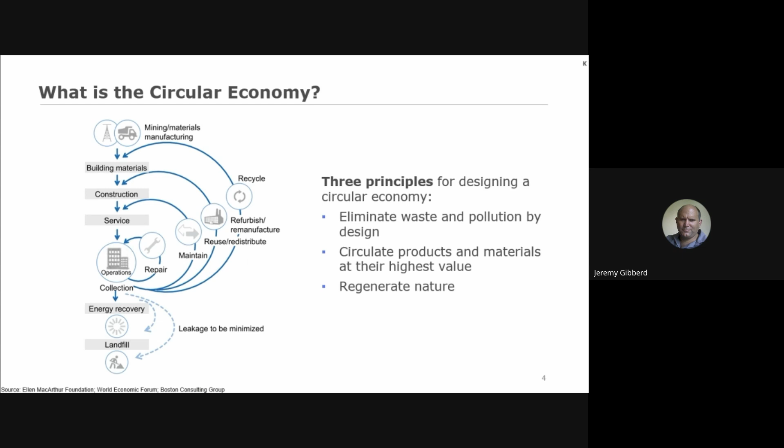So the preference is really to stay in the inner loop first, to repair and maintain first, and then to redistribute and refurbish, and to recycle later. This is sometimes also called the inertia principle. We don't go to the next loop until the first loop cannot be pursued. So we're focusing on the inner loops first.

The third principle is the regeneration of nature. By extending product life, we need fewer virgin materials and at a lower frequency, which allows nature to take a break and to regenerate. Also, by generating less waste, we need less space for landfills, which will provide breathing space and habitat for biodiversity. And by actively seeking to circulate biological substances, to use fewer chemicals and to reuse nutrients that are in the systems, we change the quality of soils and overall allow nature to restore.

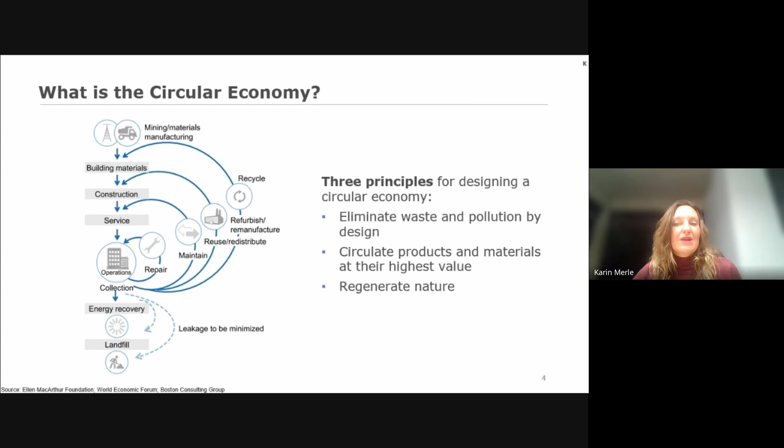As a matter of fact, the construction industry uses a large portion of natural resources, and the waste produced at construction and demolition sites accounts for 30% of total waste produced globally. An estimated 75% of the construction and demolition waste has a residual value, but it is not used nor recycled.

And you can see on the right-hand side of this illustration that there are actually options to recover such materials, for example, as fertilizer additive, as gravel, or as road building or flooring materials. A study team looked into the case of the city of Vienna and found that if Vienna were reusing and recycling the construction mineral, then the city could actually reduce its need to import by 32%.

And for example, under the leadership of the Do Tank Circular City Vienna, that is a strategy for 2020 to 2030, Vienna decided to launch a first pilot project in an urban expansion. The elements that they utilize include landmass coordination with mobile machinery, and another one is planning and construction building with a higher circularity factor. In this pilot project, they aim to use recycled concrete and insulation material in new buildings.

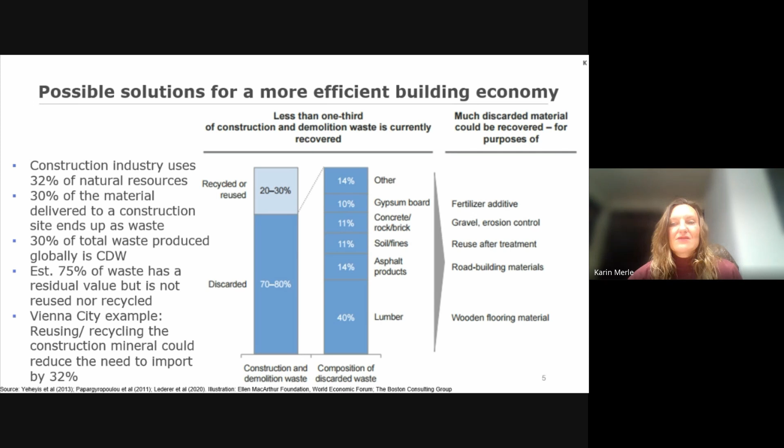And as an additional step, the city will organize citizens outreach events via a container pop-up office to make citizens more aware about the lessons learned and how important refurbishment is, and how important also using secondary materials is. So this shows how the city could influence the market towards more circular solutions in the construction sector.

We also looked into the South African case and found this data set here, which indicates that the majority of the construction and demolition waste in South Africa are masonry and concrete, with 36% and 38% each. So there are 4 destinations where the construction and demolition waste ends up. There are landfills, so the majority of the waste is ending up there and it's saturating the capacity fast. Then there are opportunities of formal recycling, informal dumping, and informal reuse, whereas only a small fraction actually is reused or recycled. And then there are also some loops between these.

At the landfills, this material will be used as cover material or would be downcycled. And a small portion will from there go into formal recycling and some informal reuse. Some of the construction and demolition waste, however, is also informally dumped and might be informally reused, but data on this is scarce. So overall estimates for the construction and demolition waste range between 5 to 8 million tons to between 14.3 to 32.5. So you see there is a large discrepancy as real data is not really readily available.

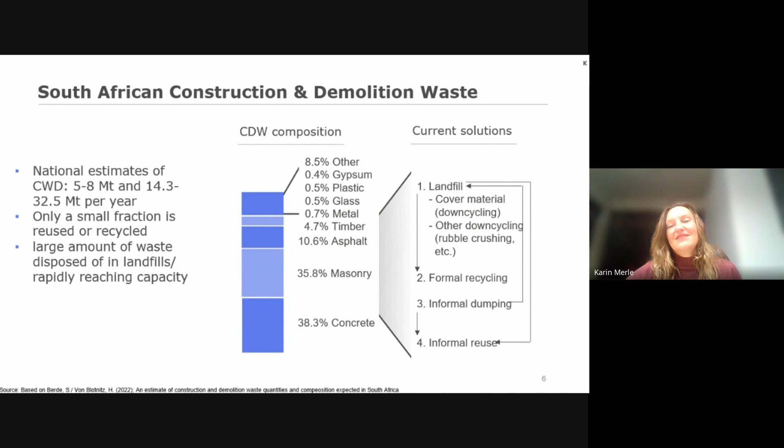What causes waste at South Africa's building sites? According to an article from the University of Witwatersrand in Johannesburg, there are several reasons, and we summarize the most frequent ones. So, for example, procurement aspects. We have procured the wrong items. We have overstocked, we bought in bulk. Perhaps there was a mistake in the delivery. Or the second one, we often have a variation order. For example, the design had to be changed during construction stage, or the site conditions changed, the specification of the materials changed, the bill of quantities of work changed, or we're waiting for replacements.

The materials did not meet the requirements and therefore had to be discarded, or had to be discarded earlier than assumed. We estimated inaccurately and therefore have an oversupply or wrong specifications, or the laborer or subcontractor that we use were not very skillful and therefore operated in a very wasteful manner, or supervision could have been poor, therefore the construction was done in a less efficient way. So materials are being discarded more than originally planned.

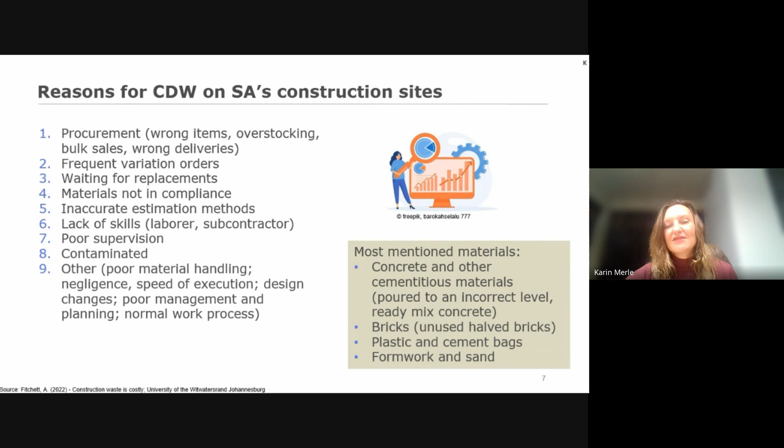Also, material or components could be contaminated, for example, with toxic materials or with paint or other contaminants. So we cannot use them anymore in the function in which they were meant to be used, or other reasons. And not to forget that every normal work process also has some losses because not everything runs perfectly. So yeah, we also provide you with a box on the right-hand side with the most mentioned materials when it comes to waste at construction sites. And this is in line with the earlier slide as well.

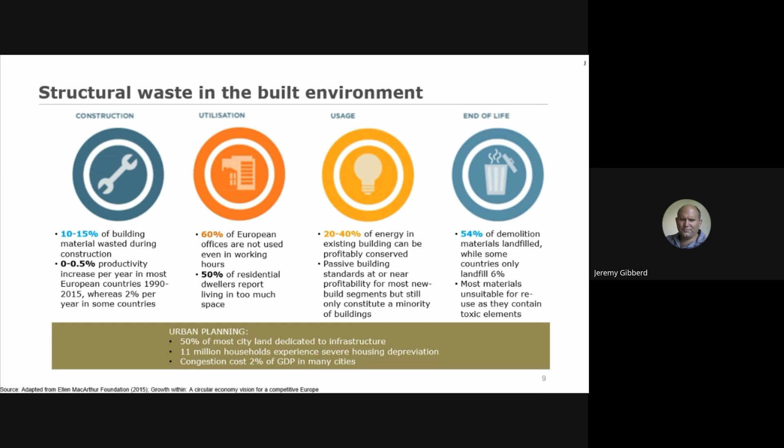So what I'm going to run through now is just opportunities, because many aspects of climate change are about the negative aspects and how do we deal with climate change, reducing carbon emissions, etc. The difference with the circular economy is it offers a huge number of opportunities.

So to start off with, when we look at materials and where we get materials from, we are typically looking at bio-based renewable energy sources. So again, there's opportunities to supply new materials, different materials. We tend to aim to look at materials that can be manufactured from waste. So again, there's a whole set of opportunities for small enterprises in that area.

How we manufacture materials. So industrial symbiosis, where you link a set of industries so that you use the waste from one industry as a useful input for another, so that you get a very efficient ecosystem of industries, is another very interesting opportunity, and that's starting to be explored in South Africa and Namibia, etc.

Karin mentioned product as a service. Again, we are going to give some examples later, so I won't talk about that too much, but it's about providing the service and allowing a supplier to maintain ownership of the equipment, and they then just charge you for the service, such as energy or such as light.

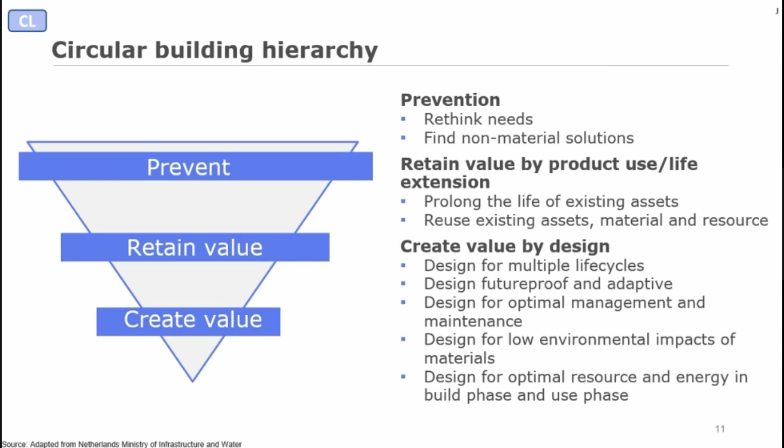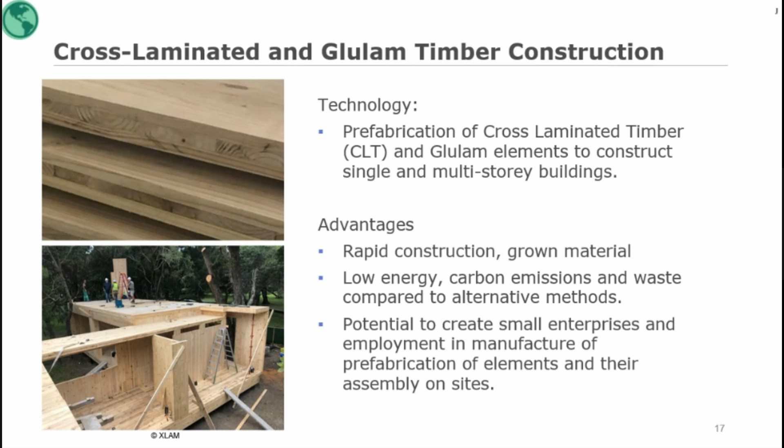And the key knock-on effect from this is the need for sustainable timber and sustainable forestry. And we've got very good resources in South Africa for that. So we can regenerate a lot of land, a lot of farming for that.

The next one is a project I did in Zambia, and it was for the ILO and UNEP. What was interesting here was that we looked at the current way a lot of new houses were being built, mainly built of imported material, a lot of it Chinese, some South African, and a lot of this material had a fairly short life and went into landfill afterwards. And instead of that, what we did was we looked at designing local houses.

And really what we wanted to do here, and we demonstrated it, was that you could design very high quality houses and components that could then stimulate the local forestry industry, create a lot of jobs in forestry, but also in manufacturing, and reduce carbon emissions and landfill.

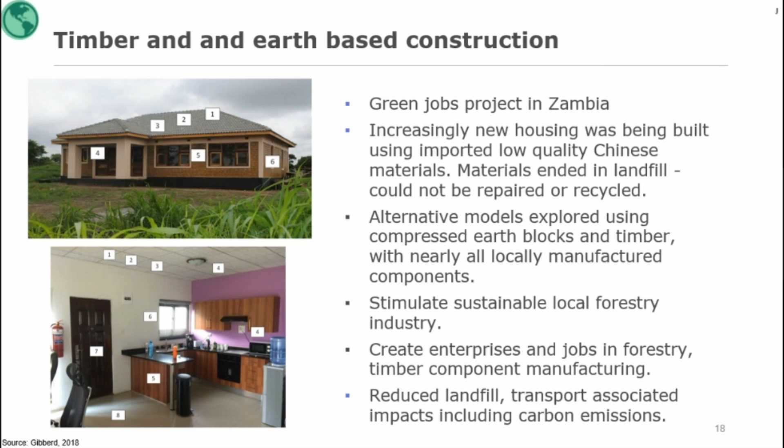Great. Brings us to the next one, that is mycelium, which is a vegetative part of a fungus. So it can actually be used to build structures with agricultural fiber. So it has first been a material invented to replace wine packaging made from styrofoam. And then the inventor branched into other use cases for different sectors, including the construction sector and interior design.

So mycelium as a construction material offers great opportunities for upcycling agricultural waste into a low-cost, sustainable and biodegradable material alternative. Mycelium-based composites are novel, affordable and environmentally friendly materials with great potential for application in the construction industry.

These materials apply biofabrication of natural fungal growth with some cellulose byproducts to develop sustainable alternatives to traditional energy-intensive construction materials. So among their properties are compostability, rapid growth into almost any given form. So you can just create a form and the fungus will build macrostructures with the agricultural fiber in this form. It provides acoustic and thermal insulation and is also self-binding.

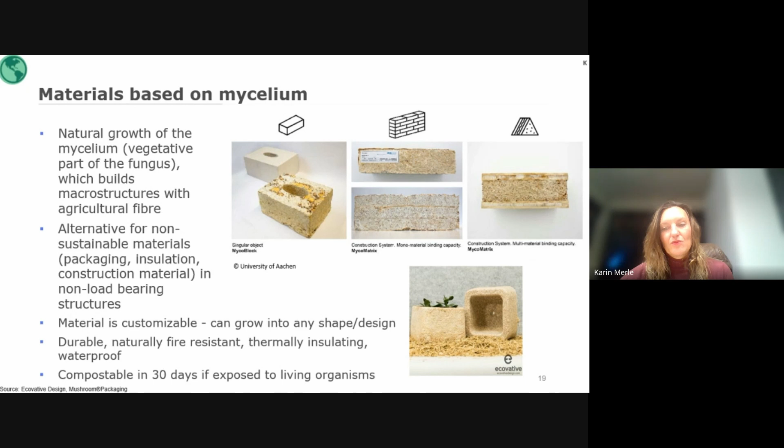The app actually provides a solution to pool vehicles like tractors for different farmers, and you can abstract this for any sector really. It could be also in the construction sector, that a platform is created for different users that don't use the same vehicle all the time. It would stand idle when it was not used. And through the application, it is possible to book the time that is convenient for each of the users and pay for just that use of this vehicle for this time.

It can be also used, for example, for tools or other instruments. Advantages are that you can improve the efficiency by accessing the equipment that improves productivity and also cost effectiveness for the individual user.

It reduces energy and carbon emissions and the cost associated with eventually duplicated or unproductive equipment. If all, let's say, farmers in this case would have to buy the same vehicle and it stands in front of their farm for most of the time, this is the energy and carbon emission and cost that will not be produced in this case when they share the same vehicle. And its potential to create small enterprises and jobs that provide, service and maintain, and also provide training for equipment.

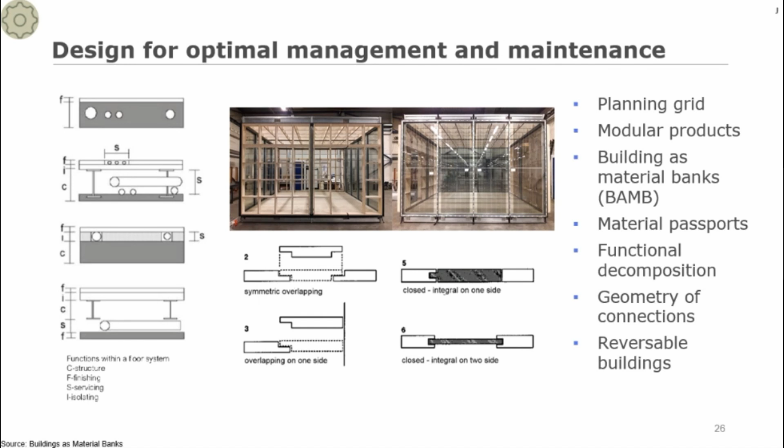So this was a project that we entered in the World Circular Economy Forum, which is a prototype for housing in African cities. And the way we designed it was to have a very simple structural frame, could be concrete or timber, and then all of the components could be bio-based materials, very easy to adapt, install using local entrepreneurs, and then have easily maintained components.

And on the roof, have renewable energy, vegetable gardens, and really stimulate local circular economy services, so that you worked as part of the neighborhood for things like food, work, material, etc. So quite an interesting project, very optimized.

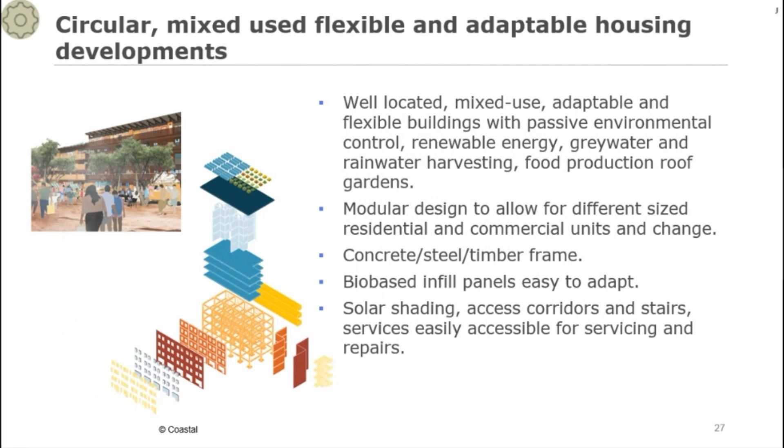The loop strategy comes back to the very core of the second circular economy principle. We keep the products and materials that we have already put into the market as long as possible in the economy at their highest value. So we do that in cycles of repair, retrofitting, recycling, following that hierarchy of repair first, then remanufacturing, then recycling.

The recycling of concrete from demolition is a good example. The material can be utilized as aggregate for building products, such as bricks and blocks, as reinforced concrete or precast elements. Or other use cases include pavements or foundations and using the material in road construction. So this will not only be less costly, but also reduces the energy footprint and with it the carbon emissions and waste associated with the product.

Yeah, concrete usually has a high energy footprint, which is why such an advantage counts a lot. And we also reduce the need for landfill capacity drastically and the cost and emissions spent when transporting the material to the landfill site. And moreover, such reuse has the potential to create new enterprises and new jobs, especially locally.

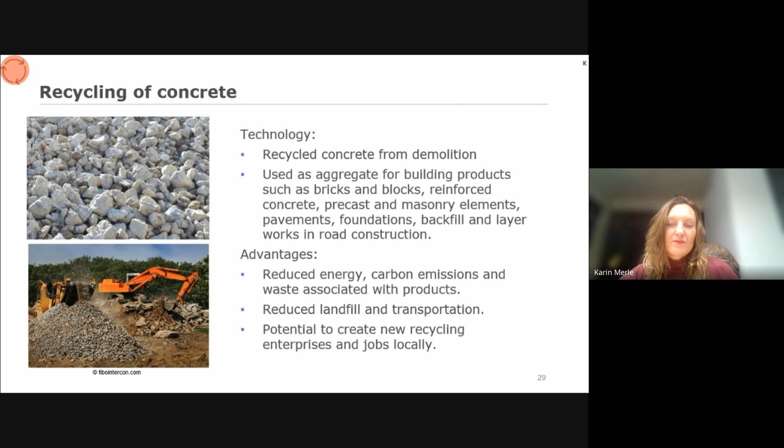What I've seen increasing is the reuse of plastic waste to manufacture all kinds of furniture and design components such as planks or outdoor furniture. Generally, even real low quality plastic can be used for this process. For example, I call it contaminated plastics from marine litter. So it's not in a good shape anymore because it has been suffering from saltwater influence, but even that material can be used and turned into furniture or components. So the design nowadays imitates even wood quite well, especially if it includes real wood fiber.

As with the earlier concrete reuse, we can decrease the need for landfilling, as well as the transporting, and also increase job opportunities. The process can serve as an interim technology, decreasing undesirable plastic material, for example, plastic from marine litter, and to bring these materials back to the market.

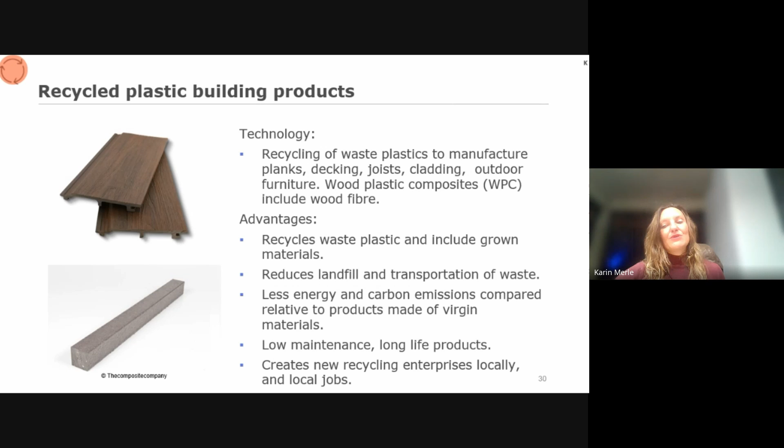The products are made for durability, even under extreme conditions, so outdoor conditions, and need a much lower level of maintenance. Examples in the industry are Block Solutions, which is based in Europe. And for example, in the Philippines, I visited a company that is called the Plastic Flamingo, and they were able to offer furniture for schools.

So another interesting example is cellulose loose fill insulation. So this is made typically from newspaper, but it can be made from different types of paper. And it's shredded into a very light consistency, and it makes very good insulation. So it can be blown into cavities, it can be blown into ceiling voids, and the equipment required is very simple. It's something that a small entrepreneur can very easily afford, and you can manufacture the material and install it. So it's highly suitable for small entrepreneurs.

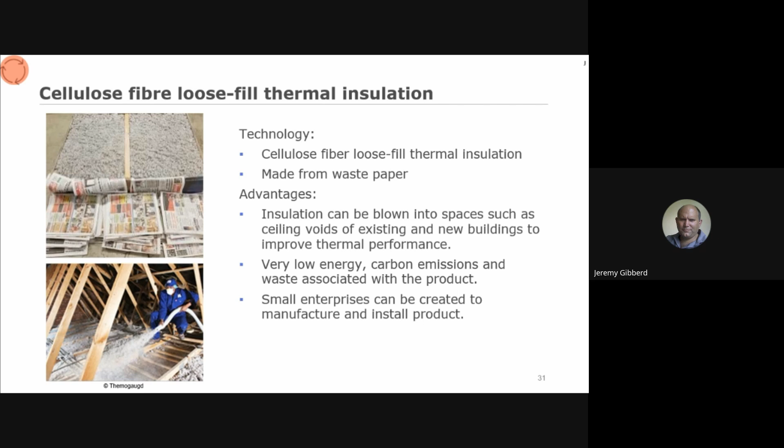You take waste out of landfill, very low carbon emissions, and the possibility for creating lots of jobs, and obviously much more comfortable, energy efficient buildings.

Now, can we entirely get rid of material, or can we displace resource use with virtual use? Some industries have revolutionized. For example, we've seen the replacement of the music cassette by streaming services like Spotify, or the video cassette replaced by streaming services like Netflix. Can we in the construction sector replace physical products and services with virtual services? Can we replace physical with virtual locations? And can we deliver services remotely? This will be part of this strategy, the virtualize strategy.

And especially during COVID, these applied measures did prove that we all were more digital than we thought we would ever be. And as a global community, we moved quite fast into using Zoom, Teams, Google Meet, and the like, that now allow for meetings as well as training to be held online. We can furthermore count on more online learning resources, including for architects and the wider built environment sector. This eliminates the need for travel and decreases the respective cost and time spent on traveling.

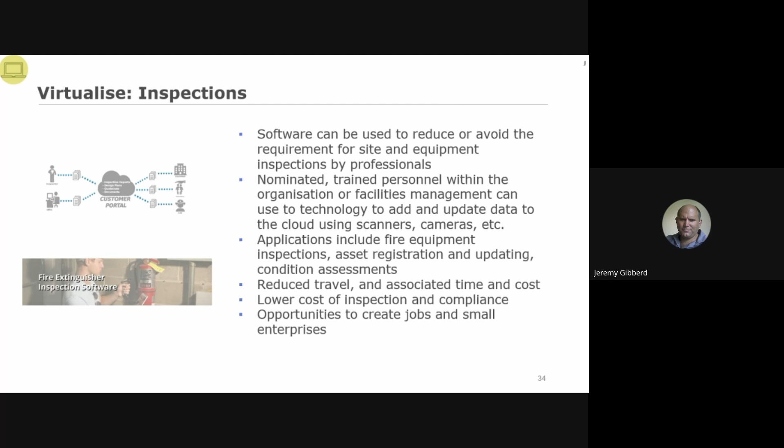Great. And we come to the last of 6 circular business strategies, exchange, which stands for the wise selection of resources and technology. So possible options are to replace with renewable energy and materials, to use alternative material inputs, to replace traditional solutions with advanced technology, and to replace product-centric delivery models with new service-centric ones.

So this is something that's happened really as a result of Eskom's load shedding. A lot of people have started looking at renewable energy systems. Obviously, it's a substantial capital cost. And what is starting to happen now is there are many new companies and banks and installers who will install a full system with batteries, PV panels, inverters, etc., at a very similar cost per kilowatt hour rate or at a monthly rental cost, and provide this as energy as a service, or rather, as a product as a service. So you as a building owner don't need to contribute that capital outlay.

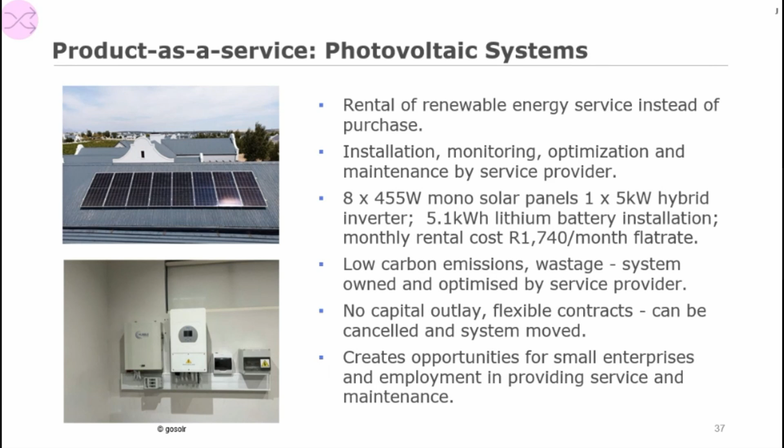There's no capital outlay, but you get the full benefit of renewable energy, and all the maintenance is done by a company. So again, lots of opportunities for small enterprises, maintaining, installing this equipment, but also very rapid uptake of renewable energy systems, especially now with the 125% tax benefit that's associated with renewable energy.

And another example is Signify, the former Philips Lighting, which offers lighting as a service. Customers do not buy the lamp and electricity separately, but they pay for their lighting solutions in a package per lux spent. This means that ownership of the good is not transferred to the customer, but remains with Signify. And Signify charges its customers per light hour and not per bulb. Signify has implemented this model at Schiphol Airport in Amsterdam. It is expected to cut the energy consumption by half.

Now it's up to us, and particularly to you in the construction sector, to integrate circularity into practice. In this paradigm shift, architects have an important role to play, as Jeremy also mentioned previously. You are at the cradle of design, you are the designer of the future built environment to create material inventory for the next 20 to 30 years. How can you assume your role as a designer for zero waste? What are circular designs for new buildings and for retrofitting that you can apply in Southern Africa and maybe beyond?

We saw that there are opportunities to decrease the current inefficiencies. It will be essential that you familiarize yourself with these to be an early mover into the circular economy transition and to help translate the benefits to your clients when showing new designs to them. So these new designs would plan for repairability, for dismantleability. They would maximize the use of non-harmful materials, of renewable materials.

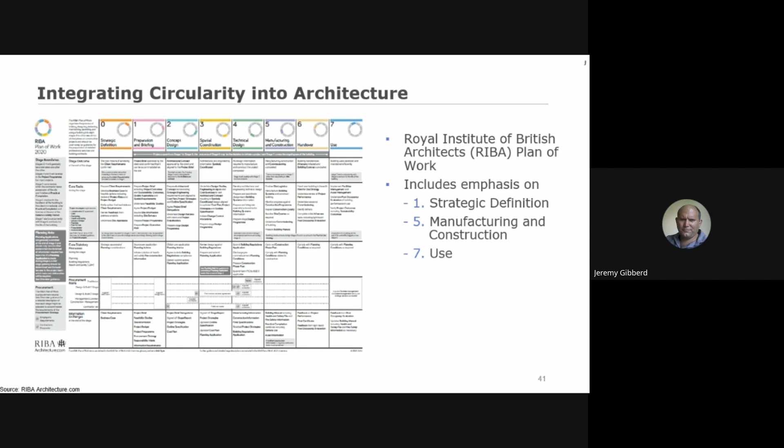And then the last thing, which is also very interesting, is there's an emphasis on use. So getting involved with operations, getting involved with your client and making sure that the systems you've designed into your building, so your components that you've designed for a very long life in terms of maintenance, are followed. Very efficient water systems, very efficient energy systems, etc. So many opportunities really to rethink the way we do architecture. And one of the things I'm going to leave you with is really to think through your standard practice processes and start thinking about opportunities. And hopefully this presentation has been useful for that.